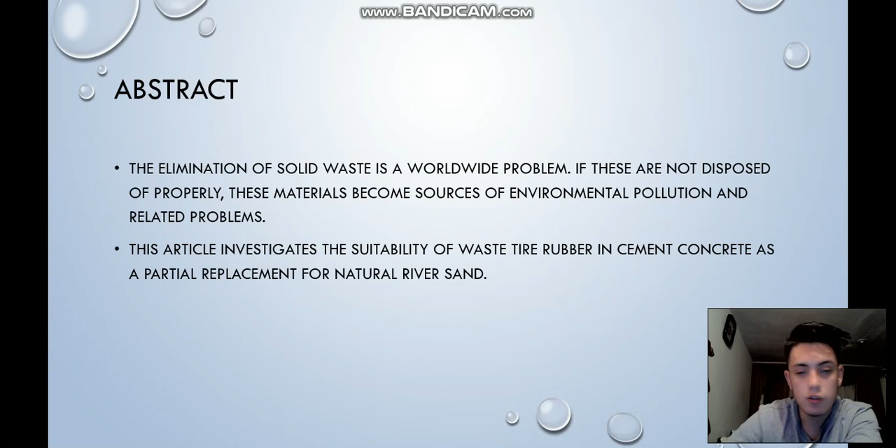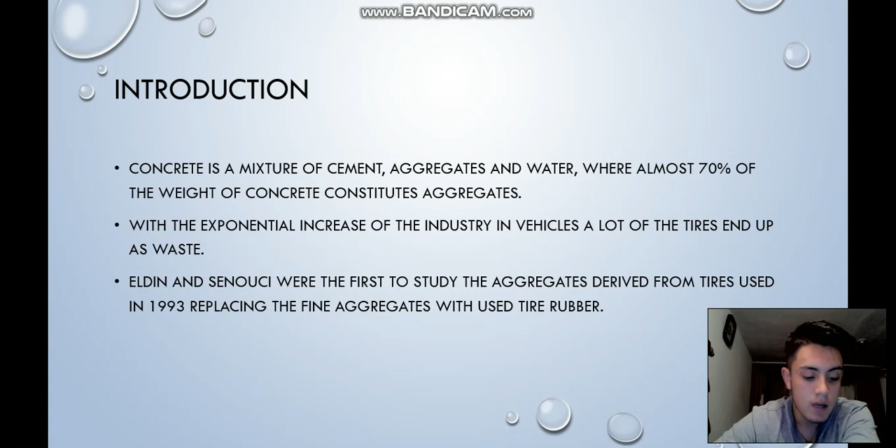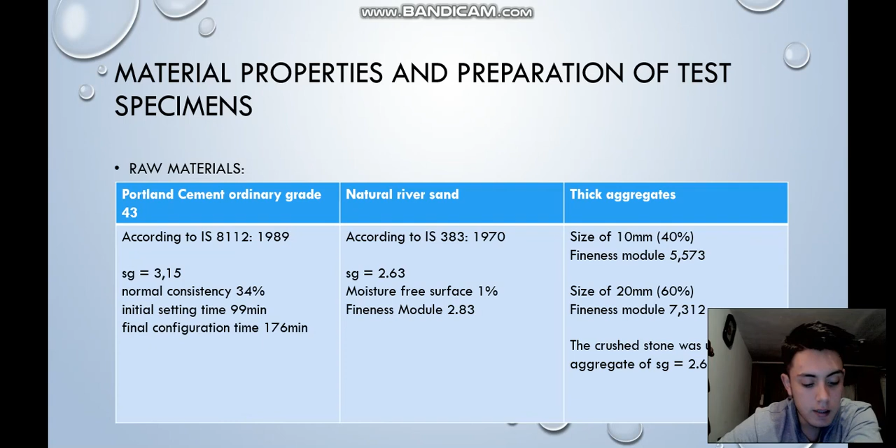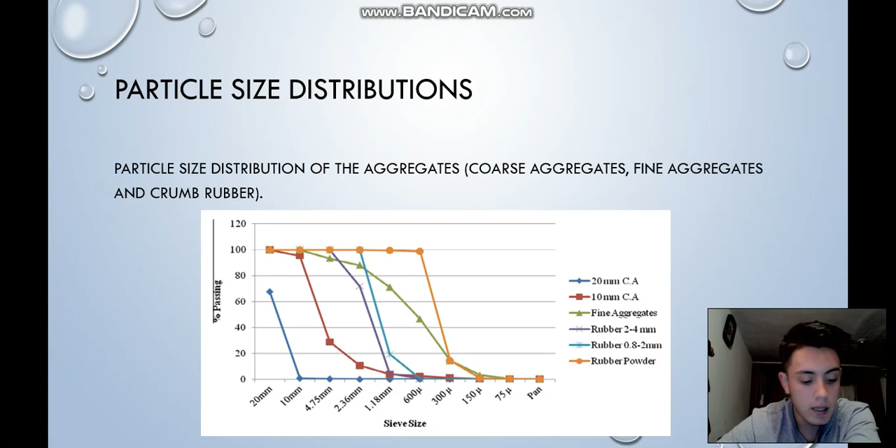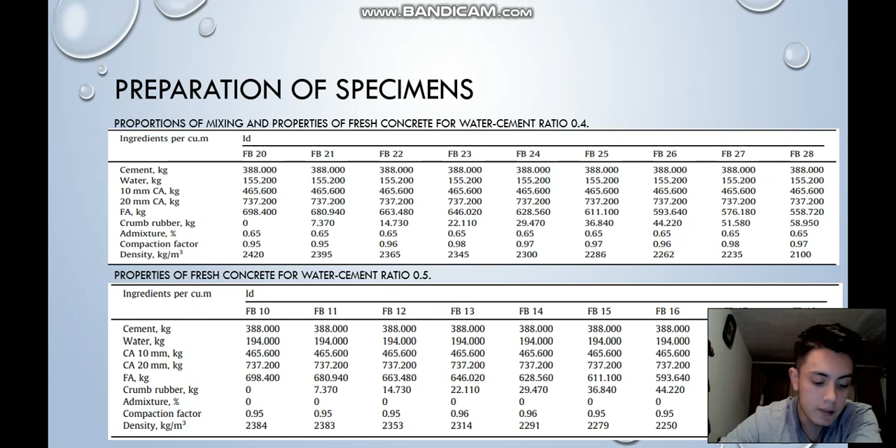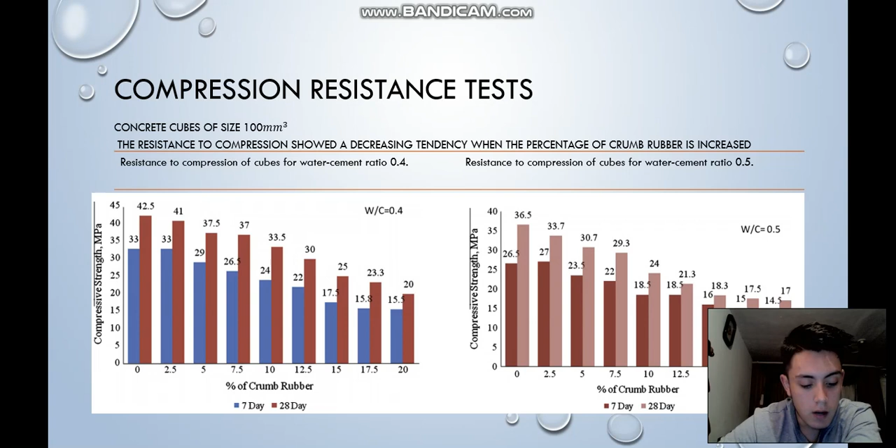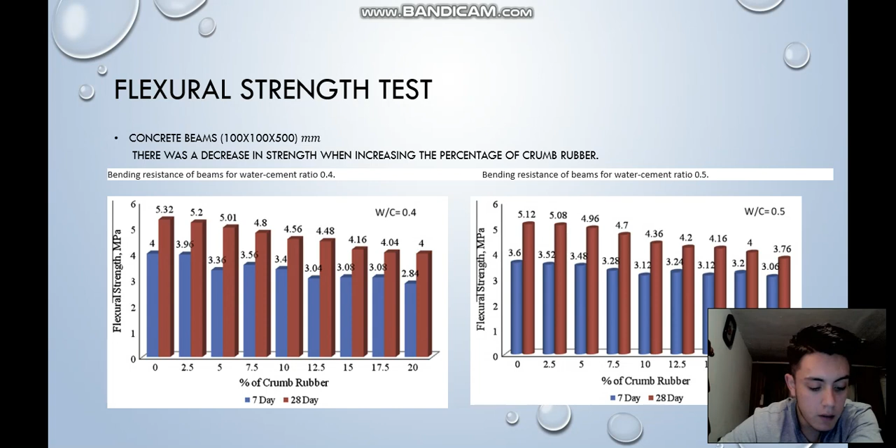Flexural strength test. In these tables we can observe the bending resistance in megapascals versus the percent of tire dust for the water cement ratio of 0.4 and 0.5. For the test, two samples were taken, one for 7 days and the other for 28 days. It was noted that the lower the amount of tire powder, the greater the resistance to bending. It was also noted the higher resistance of the 28-day sample. So it was for the water cement ratio of 0.4 and 0.5.

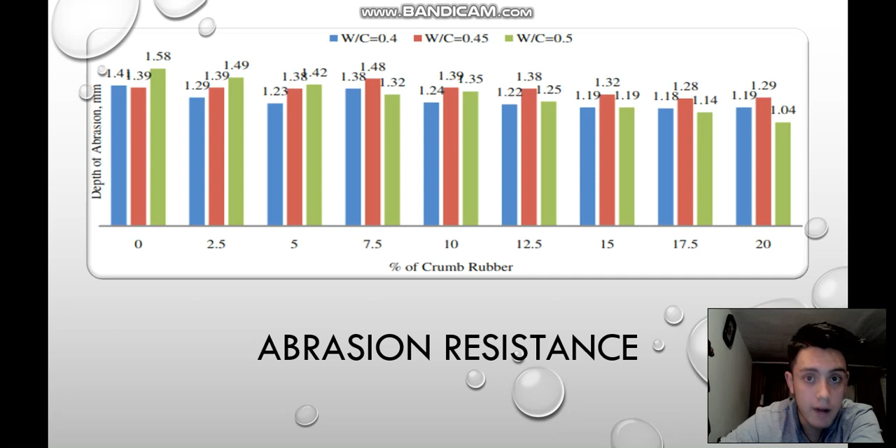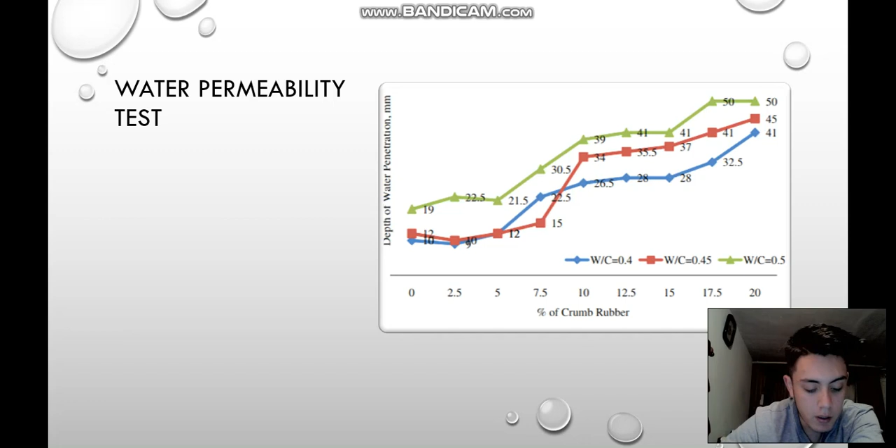Water permeability test. In this table you can see the depth of water penetration in millimeters versus the percentage of tire dust. It can be deduced that the greater the amount of tire dust, the greater the depth of water penetration, where the water cement ratio of 0.5 is the one that allows more water passage through the material, followed by 0.45 and 0.4.

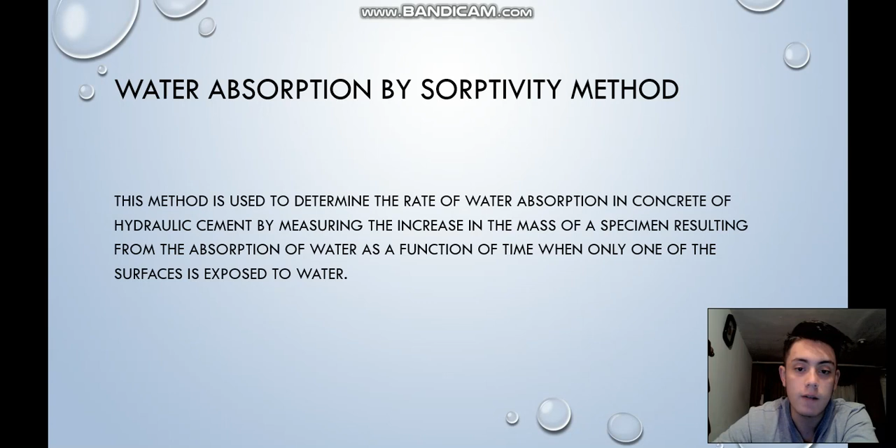For absorption, the sorptivity method. The method is used to determine the rate of water absorption in hydraulic cement concrete, by measuring the increase in the mass of specimens resulting from the absorption of water as a function of time when only one surface is exposed to the water.

Results and discussion. The density of the concrete decreased with the increasing percentage of rubber crumbs in concrete. From the results of the flexural strength test, there was a decrease in strength as the percentage of rubber increased. From the results of the abrasion test, it was observed that the rubber concrete showed better resistance to abrasion than the control mixture.

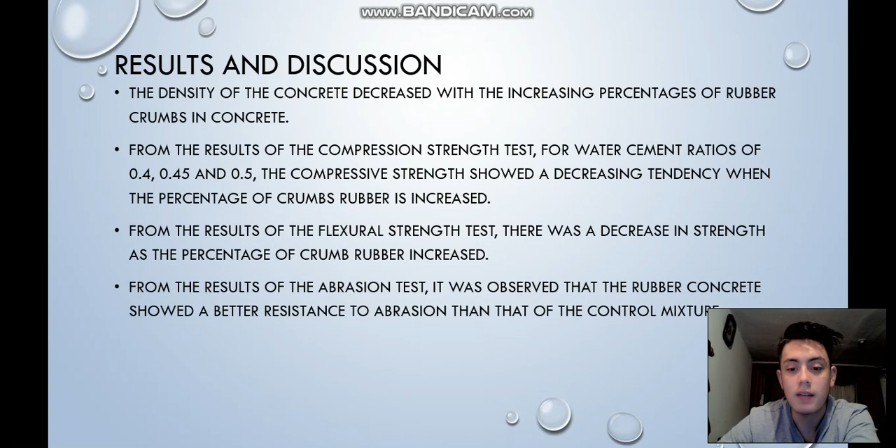Conclusion. Experiments were conducted to study the suitability of discarded rubber as a partial substitute for natural river sand. Concrete grades with water cement ratios of 0.4, 0.45 and 0.5 were studied. Substitution from 0 to 20 percent in multiples was made with crumb rubber. Samples with 0% tire rubber were taken as a control mixture.

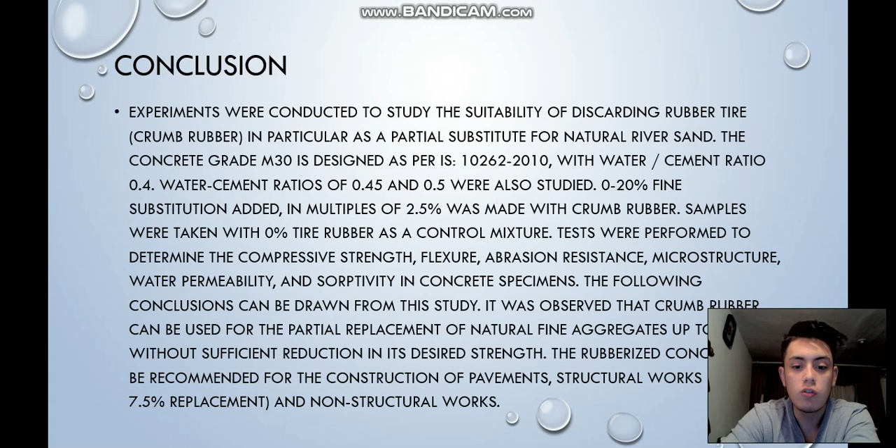Tests were performed to determine the compressive strength, flexure, abrasion resistance, microstructure, water permeability, and sorptivity in concrete specimens. The following conclusion can be drawn from the study. It was observed that rubber can be used for partial replacement of natural fine aggregates up to 7.5% without significant reduction in strength. Rubberized concrete can be recommended for the construction of pavements, structural works, and non-structural works. Thanks.